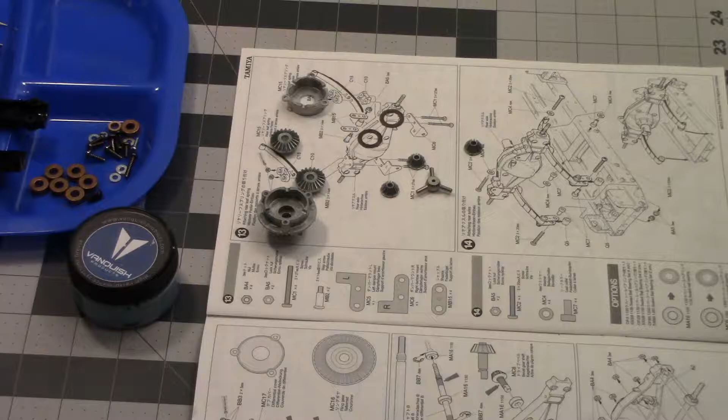What is going on, everybody? Back working on the Tamiya Scania R470 Highline.

A lot of crazy mess going on in the world right now, so I figured I'd take a couple hours, get away from all the news and other stuff, do a little work. Going to put the rear axle together.

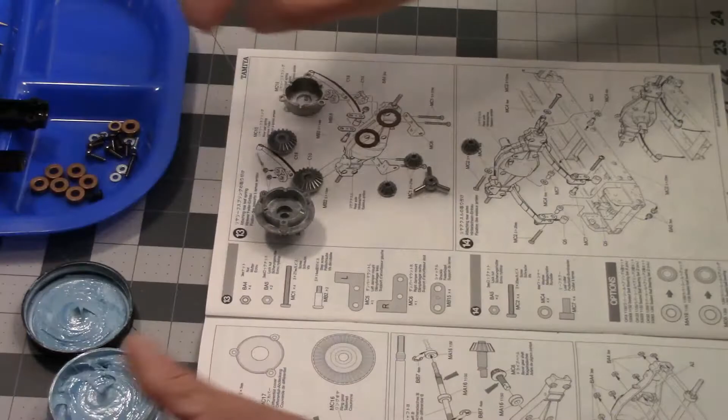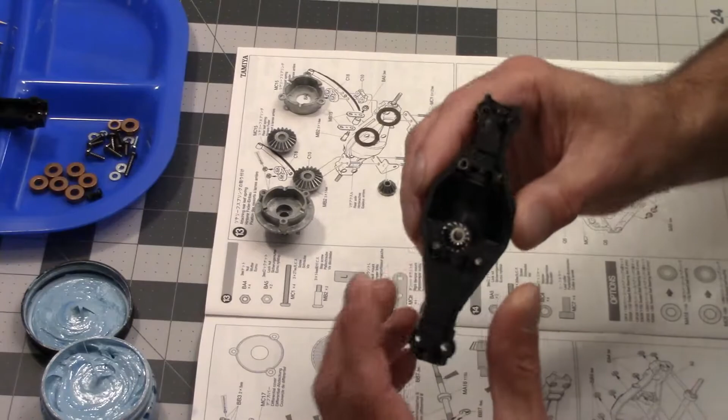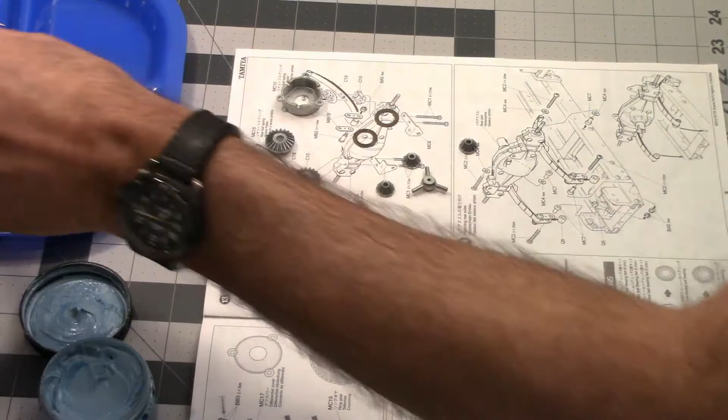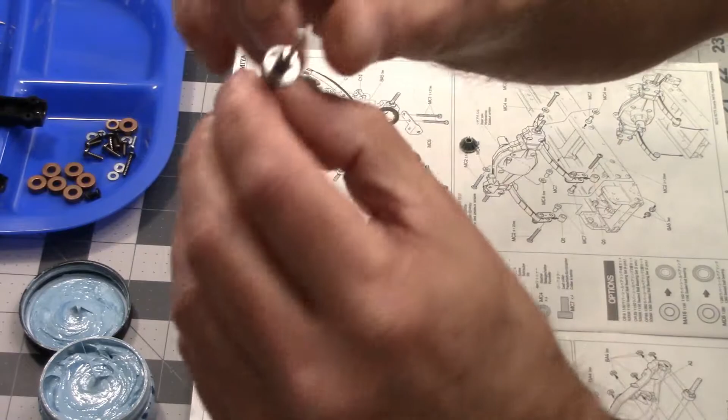Using my Vanquish Products lithium waterproof grease. I've already put the bevel gear in the front half of the axle. Pretty simple - bearing, slide the gear in, bearing, E-clip here on the back. And I've also put the bearings on the axle shafts, E-clip, 2 bearings, and an E-clip, both sides. Didn't figure there's any sense in fiddling with the little E-clips because they can be a pain.

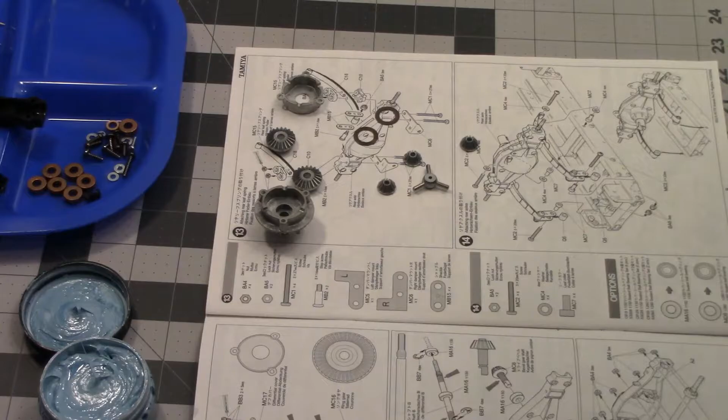Speaking of a pain, I believe I have my camera and memory card issue worked out, so we should be in true high definition now. I guess I'll find out after I get the video on the computer. But anyway, we'll move on.

Everything has got to be greased. Got little spacer washers that go on here. Like I said, I prefer this grease over the grease that comes with the kit.

Not immediately, but over time it will dry out. It takes several years. But this is a little bit better grease anyway.

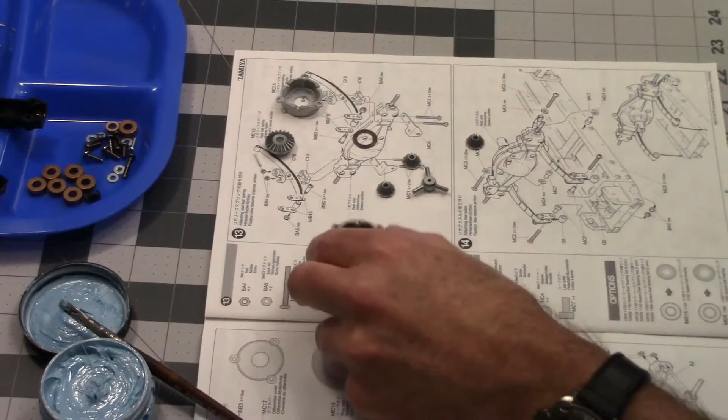Drop him in there. You don't have to overload it, just make sure everything's coated. Get a little spider gears on here.

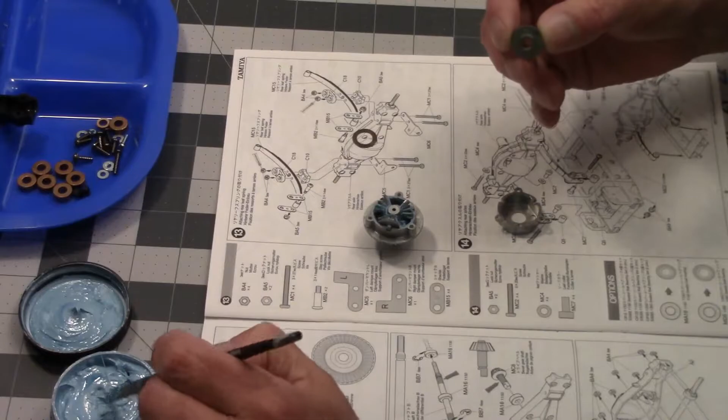I'm going to drop that down inside there before we put any grease on the gears. Same thing on the other side here. Spacer.

Line everything up, grease off our fingers. And out of all the Phillips drive screws, the three that put the diff together are Allen heads. Why is not a question I can answer. Probably because they're hardened.

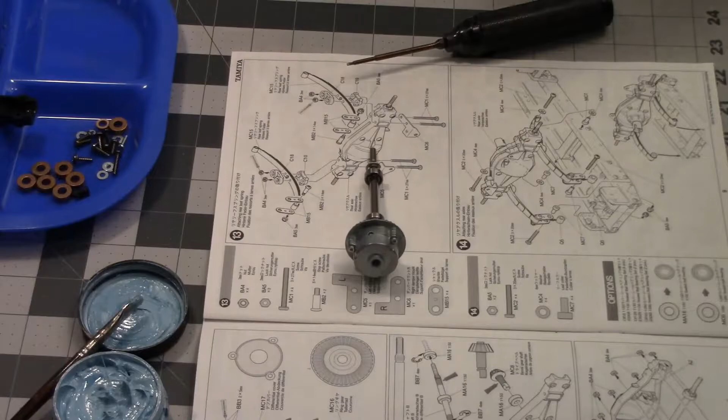Make sure you put the right one in the right side. Everything is painted like it's supposed to. And then the other side has a little pin that slips into the other. Get grease on that. Just like that. Make sure everything spins and works like it should.

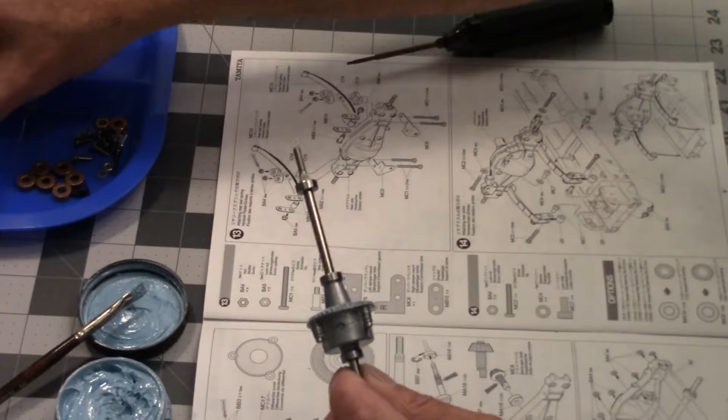We can grease this guy up. Just like that. Now we have the back half of the axle here. Gotta kind of line up the bearings and kind of drop them in there.

Then we can pop the first front half on. Just like that. Make sure everything still works. And it does.

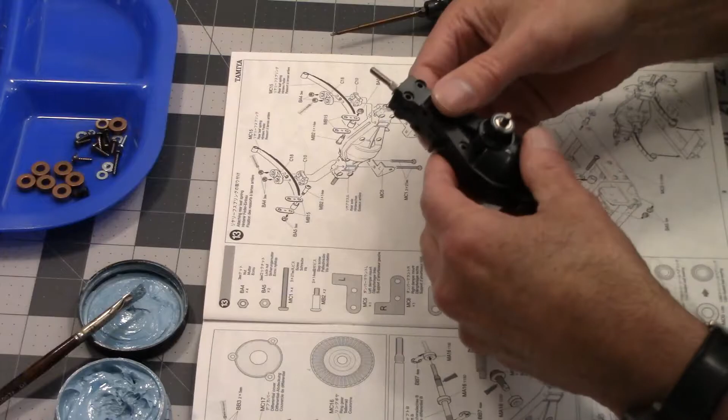And now we have little nuts, and we want to use thread lock. What side of this is M3 nuts and 3x15 bolts.

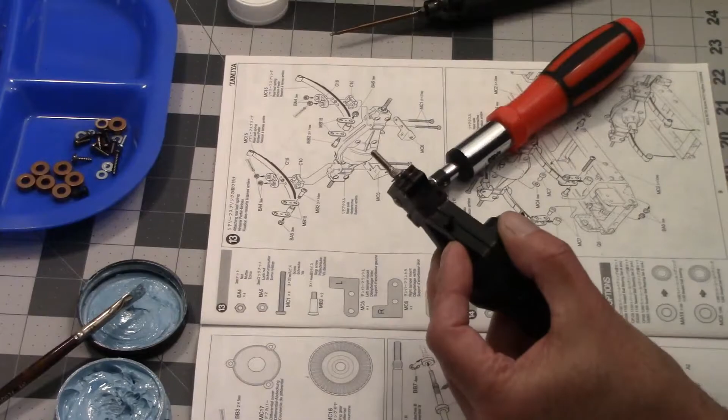Just snug them all down. Alright, check again, make sure everything's turning like it should. Everything feels good.

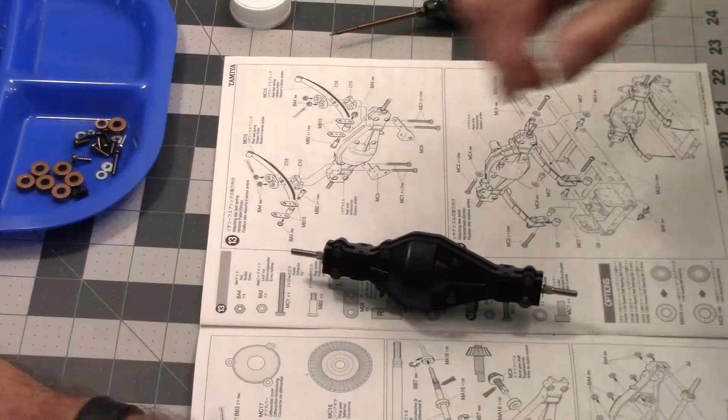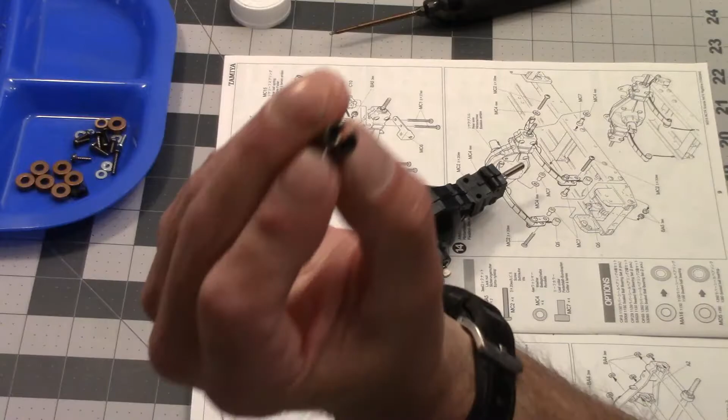Clean the grease up out of the way. And we will put our drive cup on, this little guy. The drive shaft is a dog bone type deal.

Definitely want some thread lock on that. I'm just running that in so that it sticks out where I can get it on the flat there.

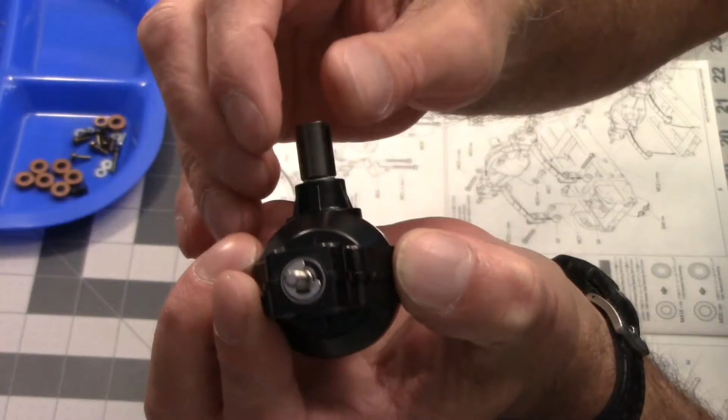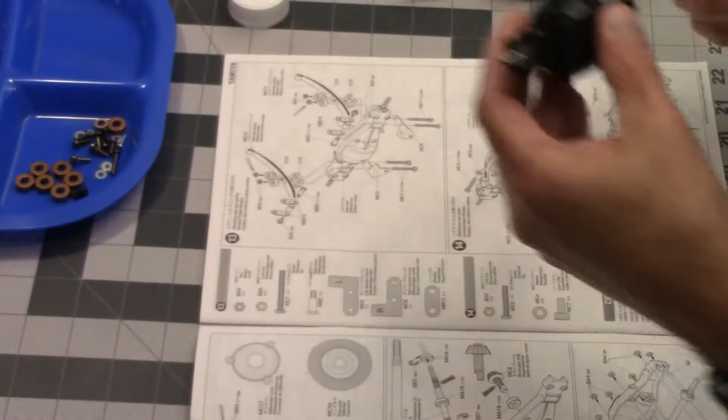Now you got your E-clip there that holds the bevel gear in. You don't want to push that drive cup all the way up against it. You want to leave just a little bit of space in there. You don't want to be rubbing that E-clip. And now, make sure you got it oriented the way it shows in the little picture book there.

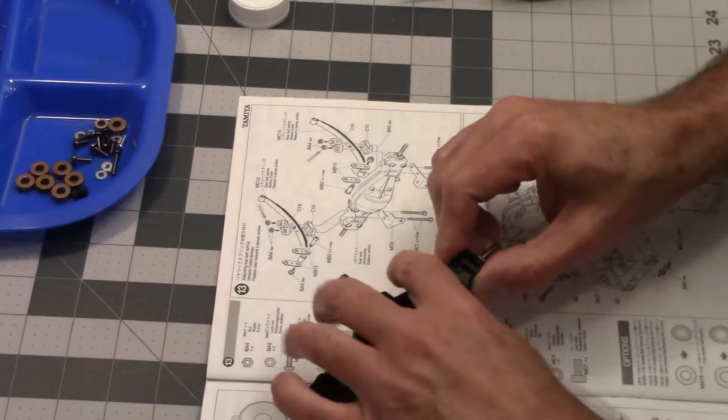And we will get our leaf springs put on. Make sure I do this right here. M3 nut.

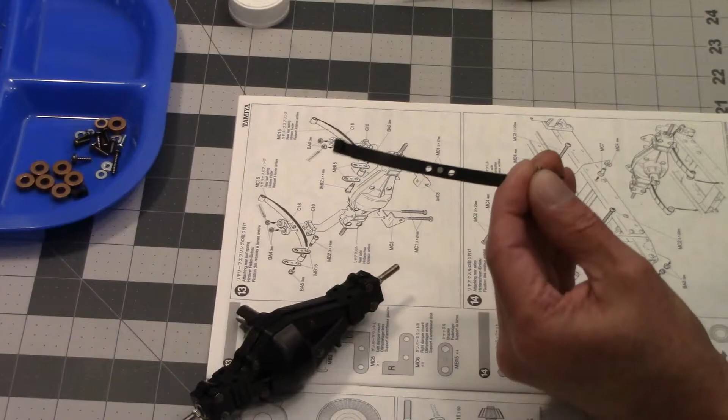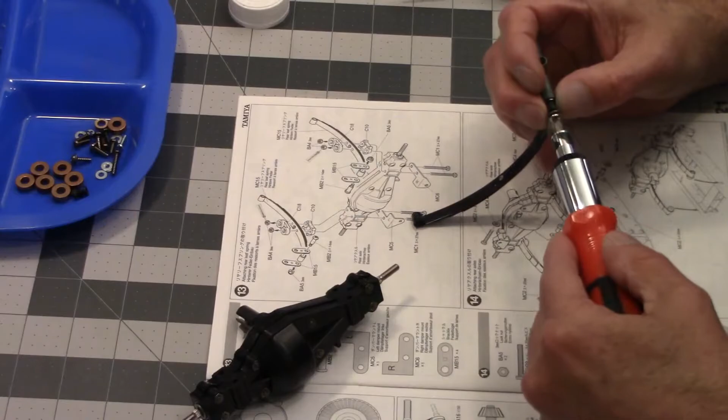What is that shoulder bolt? It's a 3 by 14. A little bit fiddly there. There we go.

Make sure they move around freely. And you do want to make sure when you put them on that the nut is facing to the outside of the axle. Otherwise it'll be rubbing against the chassis. So you do have to kind of do a left and right thing here.

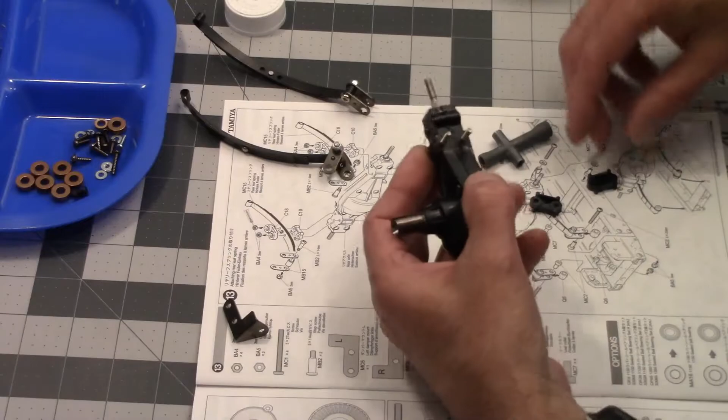Gotta kind of try to hold all of this together now. And a little cap. And 2 little nuts.

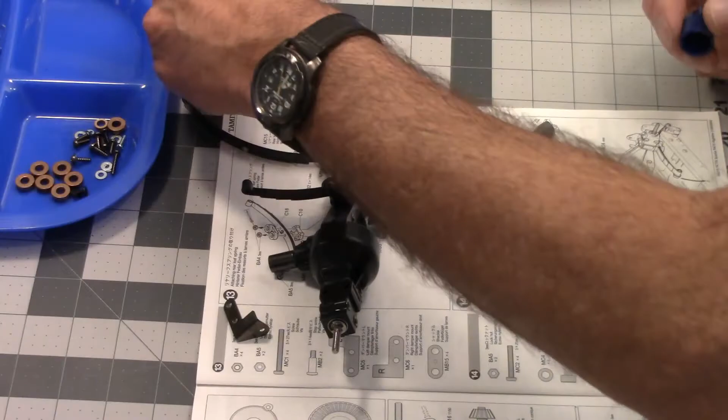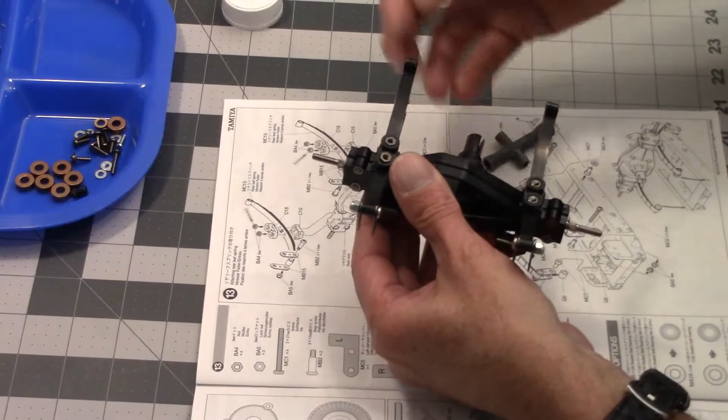Snug it down. A little more thread lock here. Just like that. And I can't believe I actually got both of them on the first try.

Alright, well, there's the basic axle put together. Now we have to bring the old chassis in here.

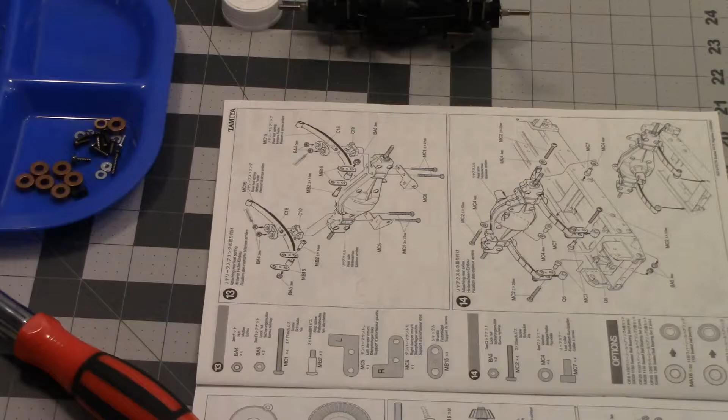Now, let's see here. Everything like that.

Right there. Okay, those are lock nuts. And they have little pockets in there for them.

To do with the other ones right there. They don't press in, but it'll keep them in place.

Okay, so we have a spacer, little metal mount, and little plastic spacers, and a 3x20 - is that a 3x20? Yes, it is.

So, kind of got to go through there. Got to put this guy on there. Alright, well, this is going to be fun.

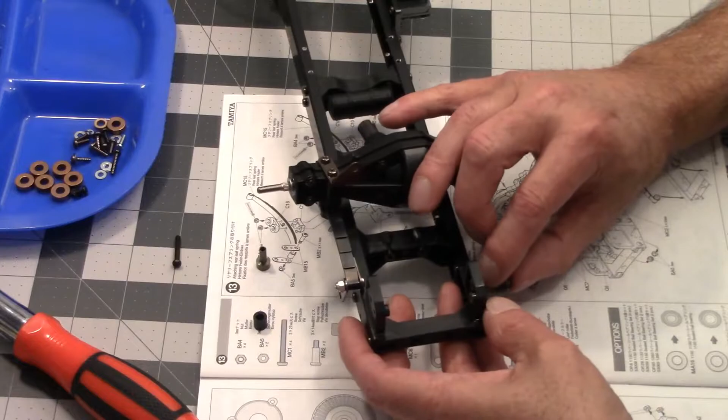There we go. We don't want to over tighten that. We want to make sure those can move back there.

Yeah, I'll see if we can do the same thing on the other side.

Here comes the fun. Alright, that worked terrible. Is the nut still in there? Yes, it is. There we go. Now you can probably only see my hands.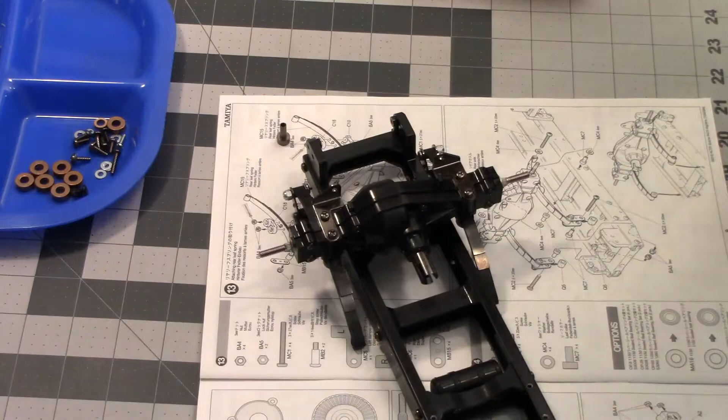Okay, alright, got him all lined up. Now we need two of these guys, just little metal spacer type doodads there. And 4mm washers, if I can get my fingers to pick them up.

There. There. And 4 3x20 bolts.

Now these, when we built the chassis, this piece here, this little chassis brace here in the middle, cross member, whatever you call it, is one that we press the lock nuts into the ends there.

So we need a washer there, a washer out here, and we can get that guy started.

Can we? No. Possible. Yeah, it's possible. Okay. Now we can tighten this side down.

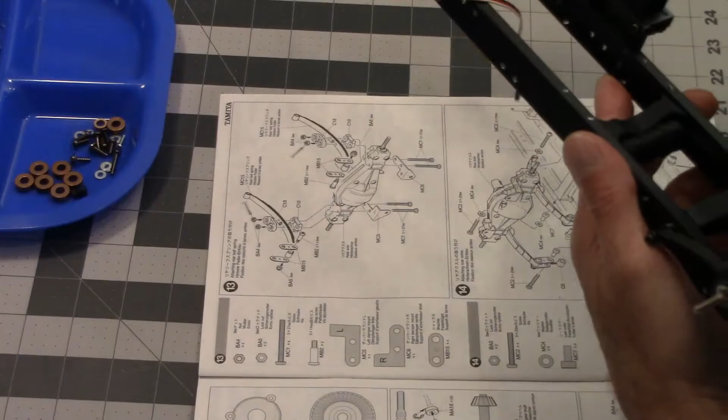Alright. Now we turn the page, and we should be mounting our shocks.

3x15 to 3x20s. 3x15s. I don't have 3x15s out. Is that 15? Yeah, that's a 15. That's a 15. Okay.

How could I be so unorganized? Pink shocks. Pink shocks. 3x15. And one of these little washer flanging nut, whatever they call it.

Pink shocks. Almost be helpful if you had small hands.

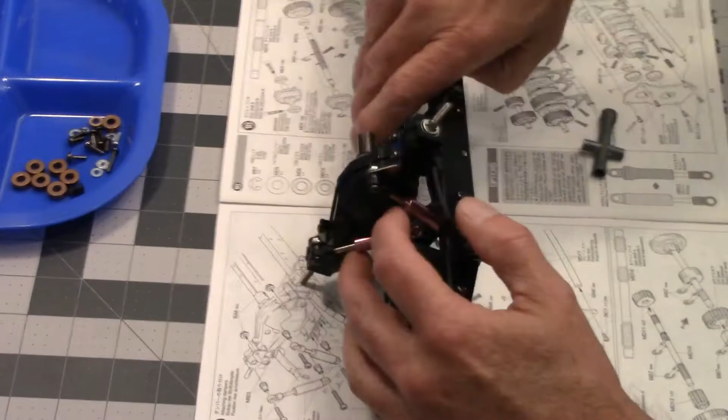Now we can flip it over. And this cross brace is the one that has the press nuts on the back of it.

Where's my other screwdriver at? Will that fit in there? No, it won't.

Heavens. Whatever will I do? That won't fit in there. Yeah, it'll fit in there good enough.

So, 3x20, and again the little middle spacers.

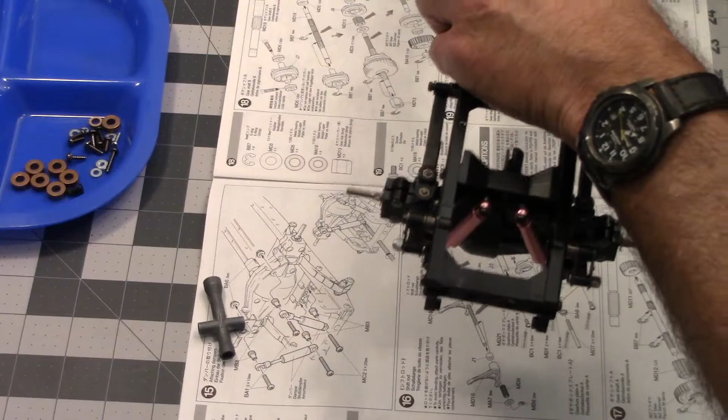Alright, now all that's out of the way. Yeah, I think we'll be alright there. Set him out of the way for a minute, because coming up next go round is the big job.

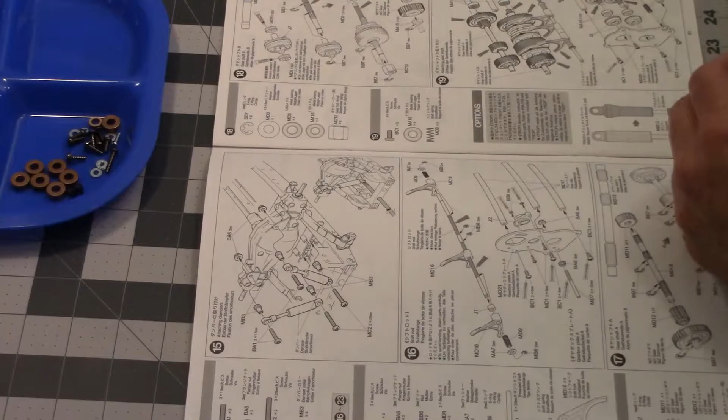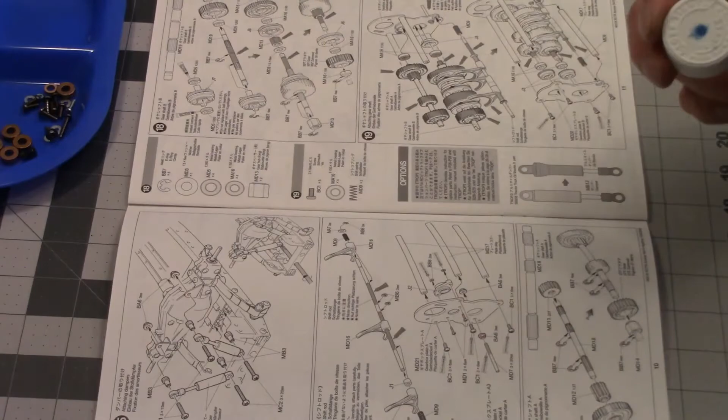A job that some people don't care for, and that is the transmission. And there's a lot going on in these transmissions, but nothing we can't handle.

Cleaning up my mess here. Hopefully sometime this week I will get the transmission put together.

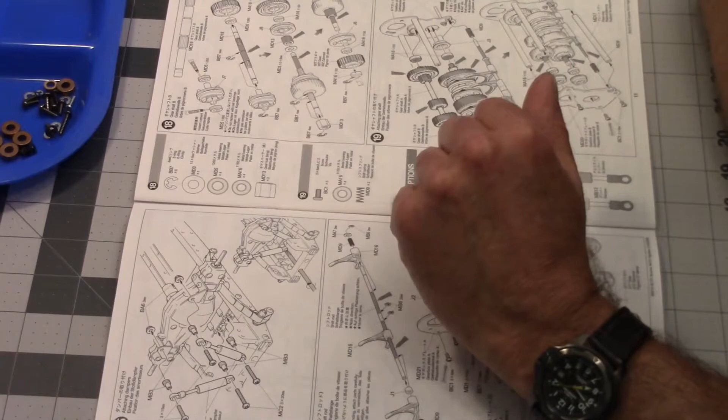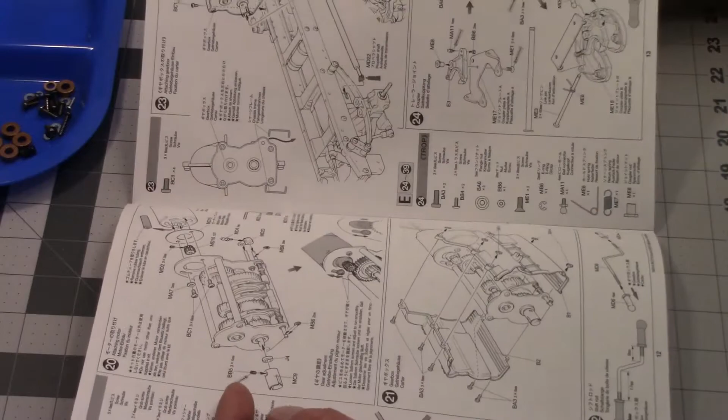I am considered an essential employee, so I am still working every day. I hate it for those people who've lost their jobs and been laid off, and it sucks. It sucks for the whole world right now, but we'll get through it. Keep on doing what we do.

Yeah, we got a long ways to go yet. The two biggest parts of these kits are the transmission and the body. The body has a lot going on with it. You got little side view mirrors to put together and all kinds of stuff. But like I said, we'll get to it all eventually.

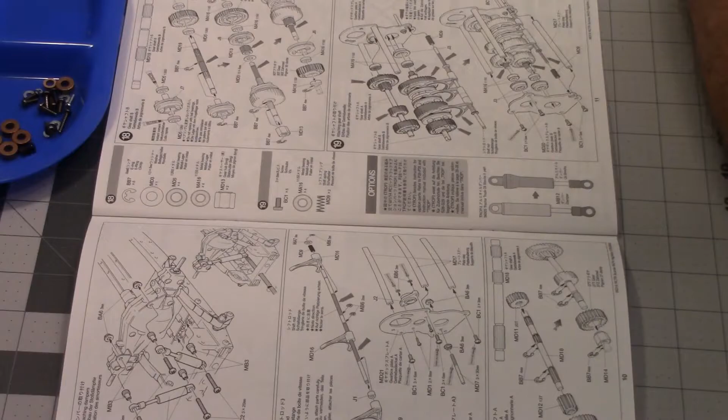I know some mail order type hobby stuff you can still get. I have heard like Asia Tees, if you want to order from Asia Tees. I'm looking for a trailer for this thing. I have a pole trailer and a flatbed trailer kit from Tamiya around here somewhere, but I'd like to get a container trailer for it. And I looked on Asia Tees, and their shipping is somewhat restricted right now. Of course, they're in Hong Kong.

The email I got from them said they can ship, but they have to ship through FedEx. They can't ship Hong Kong Post to U.S. Postal Service right now. And according to what I read, they are taking a little bit of the hit on the shipping. They're going to ship it FedEx, but basically what it sounded like to me is they're going to ship it FedEx, but they're only going to charge you for shipping it through Hong Kong Post.

So everybody's doing what they can, local hobby shops are closed. Mail order is the only way really you can get any type of hobby stuff right now. If you have a local hobby shop that does mail order, you can still get stuff through your local hobby shop. My local hobby shop is closed at least until the 1st of May.

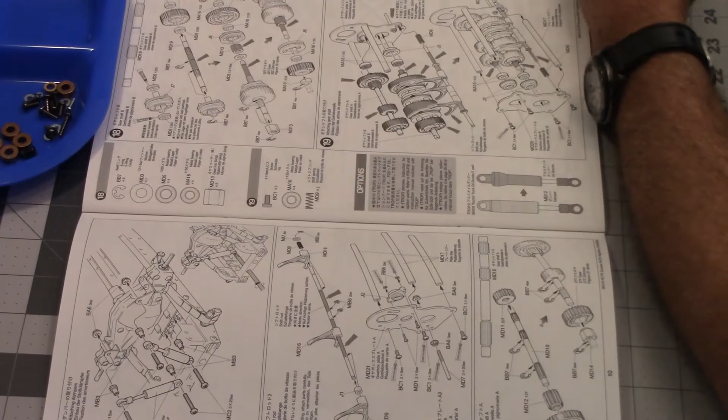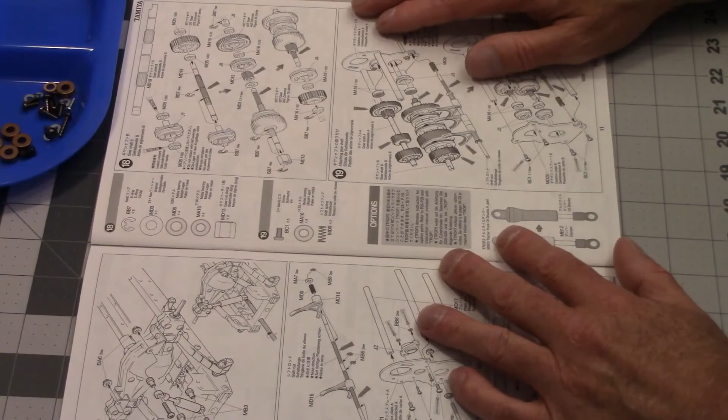Yeah, it's kind of stinking all around, but well, we got to do what we got to do, you know. So, but anyway, next time around we'll get started on the transmission, and I hope that won't be too long from now. So until then, everybody stay safe, and later.